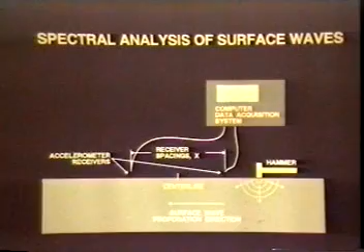I've got probably way more slides than I'll ever get through in half an hour, so we won't worry about that. I put the ones up front I think are most important to you. So with that, we'll just get into some case histories and applications here. Spectral analysis of surface waves. The only technique from one-sided access that you can sort of, in a physical testing sense, reach in and feel how hard the concrete is. That's the advantage of this technique. It shows you the variation of stiffness with depth.

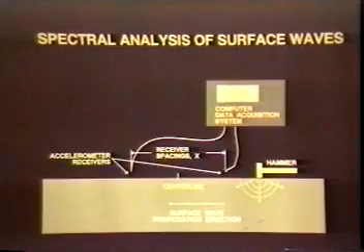So how does it do it? You have two receivers tapping the concrete, but you're looking at how a surface wave travels between the two receivers. The fundamental of physics is that velocity is equal to frequency times wavelength. I'm not going to dwell on that because with the modern PC technology and digital signal processing, it's basically done for you.

If you hit it with a high frequency impact and a short receiver spacing, you get high frequency waves. Say you had a layered system where you had different materials, ages, damage, whatever. Short high frequency wavelengths really only sample the first layer. Longer wavelengths see a combination of velocity that's a function of the stiffness of each of the layers.

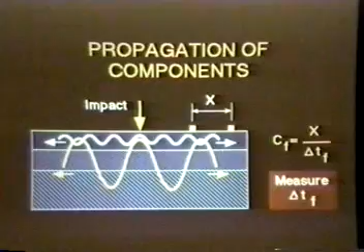This is a case history that was done a few years ago. It won a 1994 ICRI project award. Akers International was the main engineer. We were involved in looking at the condition of this dam. It was a 1906 construction vintage Tainter Gate style dam up in Michigan, subject to freeze-thaw damage. How many people know what that is? It's a log chute on a river. They used to bring the logs right through the center.

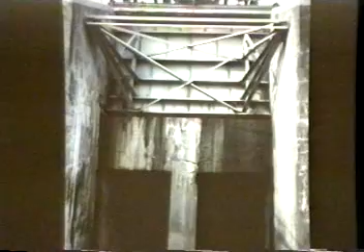Well, there's some problems with the dam. When you start looking at it, they couldn't tear it down and replace it because they'd never get it re-permitted. They'd lose all the power generation. Just wouldn't happen in today's environment. The upstream side below water, except where the ice damage occurs, was in great shape. The downstream side, which was subject to freeze-thaw and cyclic wetting and drying, had a lot of damage.

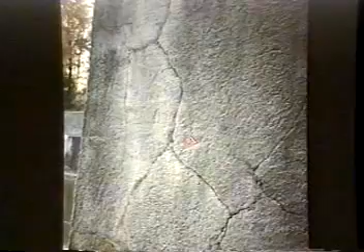They'd done a shotcrete repair and hadn't done it well because they had not removed enough of the freeze-thaw damaged concrete before they put the shotcrete on it. So just a few years after that, you had this kind of shotcrete repair. This presented problems from an impact echo testing perspective; it was hard to find spots where there was good bonding and we could test through it. Surface waves did a better job of looking through to see how deep was the damage of the freeze-thaw damaged concrete to be removed and rebuild it on the sound concrete of the piers that remain.

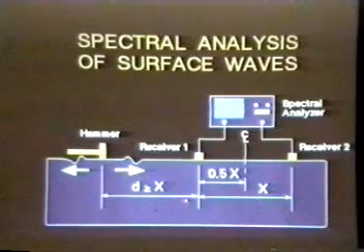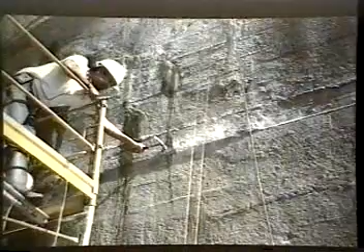So the idea again is hit it, look at the receivers, separated about X and X. So you start off with half a foot, 2 foot, 4 foot, doubling and so on to see deeper and deeper. So we did start off at about a foot with two receivers. Tap, tap, tap, took the data. Use bigger hammers to see deeper. Some of these walls and abutments were as thick as 7 feet. So we were going quite deep with the surface wave testing.

With impact echo, you have trouble seeing much deeper than 3 to 5 feet with good confidence in the data. Not so with surface waves. Your resolution of small defects diminishes, but you can see through. Literally, we've used it on dam sites for earthquake studies to several hundred feet. So you're not as limited that way.

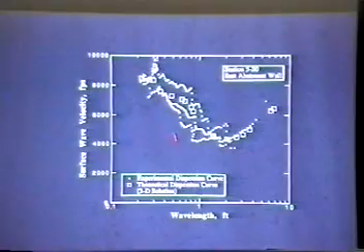The little white dots show that to about 3/10 of a foot, it was a fast shotcrete, about 8,500 feet per second. Then it got much slower to about almost 2 foot in wavelength before the data showed it getting faster. So this is like a stiff layer over a soft layer over a stiff layer. The open squares are a theoretical modeling that's done to get the thicknesses and stiffnesses of each layer.

The end result is inversion, where that's the theoretical modeling. You put in Young's modulus, or velocity of the compression wave or surface wave, Poisson's ratio, mass density. These two terms aren't too critical because you normally know them within reason. So we're really looking at velocity, which is related to modulus. Velocity squared is Young's modulus, stiffness.

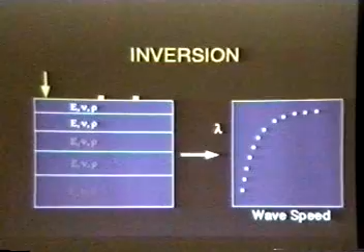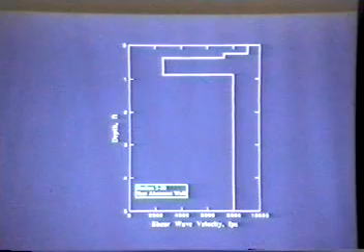So the end result was to show depth of penetration from the wall into the concrete, 0, 1, 2, 3, 4, and 5 feet. This is the fast shotcrete for about 3/10 of a foot at 8,500 feet per second. It dropped into a very damaged, down to 2,500 feet per second concrete layer. This was the freeze-thaw damaged layer. It went almost a foot deep, and then it was good concrete beyond that.

So the investigation was quite useful in indicating how much needed to be removed. When they did the removal process, it showed the damage zone. If it had been something they could have repaired, we could have done subsequent quality assurance of that repair by checking to see how much this zone was injected, say, and did it come back up into the normal velocity range.

So it's a useful test, one-sided access, literally, and I try and get people to understand this intuitively. It's like being able to reach through and feel how stiff is each layer in the system if you have a layered system.

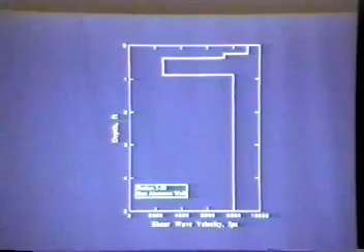We were testing a concrete wall with void and honeycomb last week. Impact echo and surface waves were done almost at the same rate of testing. First time we've been able to do that. Makes it much faster. We see this surface waves combining with some impact echo for thickness acceptance of pavements and other things where you don't know the thickness, minimizing the amount of cores, but still correlating with cores. I very much believe in cores. They're a good idea, we just take too many of them.

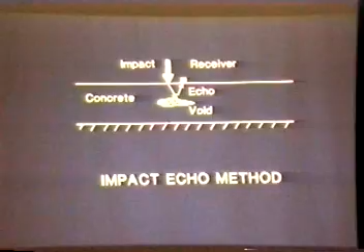Okay, impact echo. This is the one a lot of hands came up on. Hitting it, looking for an echo from a void or thickness of sound concrete, one-sided access. The basic principle, apply a force, look for the echoes in time. You can't see them. If it was metal, it's called pulse echo. You can see those echoes in time because the metal grains are so small, you can use high-frequency waves and get an echo. Concrete grains are large.

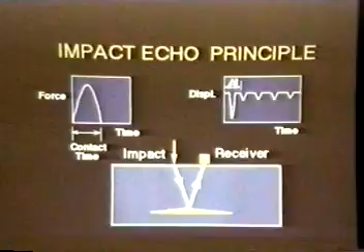You can't use high-frequency waves. You can't see the echo in the time domain. So you do frequency domain processing. You take the signal. Phase is what is used in surface waves.

I was kind to you as an audience and didn't subject you to phase discussion this morning. I know nobody will thank me for that, but I've tried it before on people and they always go, what?

Phase, though, is where we actually get the variation of velocity versus wavelength. There's a lot of technical papers on that if you want to learn about it. But the frequency spectrum is what you may have seen. This is the idea of what's the resonant thickness echo frequency. This is showing two peaks. This would be a flaw and a thickness echo.

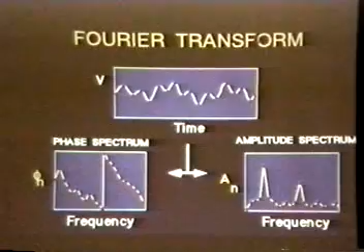Okay, here's a project we did recently with combined surface wave and impact echo testing. And it's so recent, I unfortunately don't have a slide of the results. But it was interesting because it showed a very good correlation on this old dam of an interesting phenomenon they found. They found out there were zones when they cored it of high-strength concrete and zones of low-strength concrete. I mean like 1,000 psi concrete versus 7,000 psi concrete.

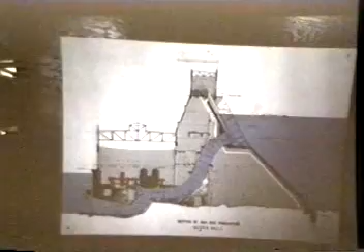You've got some problems. This shows a cross-section. You can get an idea that it's fairly good size, and you've got a lot of internal beams and walls that are bracing this whole system. Just the access through the galleyways.

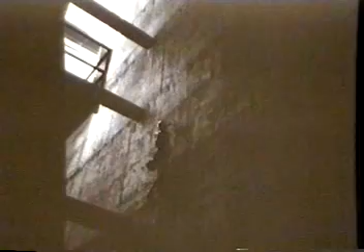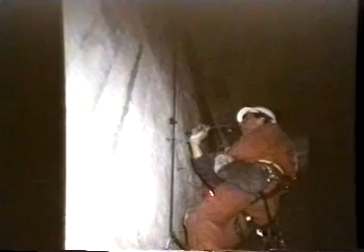The testing was interesting. A group that's called Difficult Access, I think, is the name of the company. They're out in Portland. They did the actual testing. We were there recording the data. We trained them down low, and they went and hung off of this inside of this dam all over. I'm glad they were hanging there, not me. But basically, they're hanging there and tapping and doing the impact echo and surface wave testing.

Kind of a rappelling exercise with tie-offs. Thought this was kind of interesting. The human fly. The testing was very successful in that it was correlated with cores to predict strength. We had velocities from surface waves, which was the more reliable test because sometimes the variations of thickness in the walls didn't let the impact echo test give us a good velocity. You can't measure the thickness every place.

Problem with impact echo is if the velocity varies, you can't predict the depth of the echo. Surface wave overcomes that by measuring the velocity directly. So we could tell them quality concrete regardless of the thickness of what we were testing. Excellent correlation with strength breaks on cores. It was able to evaluate where there was good and damaged concrete, aiding in their safety analysis of this dam for earthquake loading.

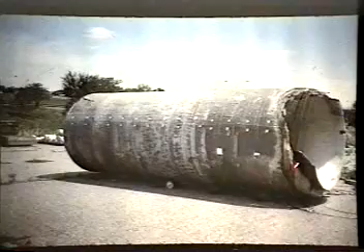We got the idea going, and the Bureau of Reclamation said we have a potential application. They have buried precast concrete pipe. Has anyone here ever been involved in repairing pre-stressed concrete cylinder pipe, out of curiosity? One person. This is what their motivation was. There's problems with pre-stressed concrete cylinder pipe sometimes. This is what we like to think of as known damage. So we were calibrating in our research. There's an area down there.

Basically, you have a thin steel shell, concrete on the inside and outside of that that's cast at the manufacturer. And then it's wrapped with a wire strand, and a mortar coat of about 3/4 inch to an inch thick is sprayed on it, is typical. Well, what can happen is you can get corrosion of the wires, popping the mortar coat. Of course, all of this pipe is generally buried. So you want to be able to test from the inside out and detect that delamination of the mortar coat, that loss of section thickness. And that's what we were doing with impact echo. That's just a close-up of some of the damage.

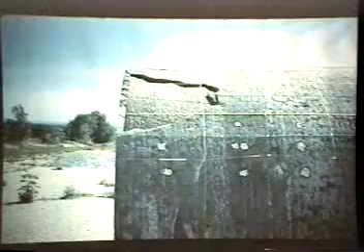If they'd have given us the contract, we'd still be working to test miles of pipeline. But just tap, tap, tap through a big pipe takes a long time. It's okay to spot check and do that type of testing. But if you're going to look at a whole pipeline, you'd like to eventually be able to scan it. And that's where we were working on the prototype technology to do that. They buried the test pipe later in the research, several sections.

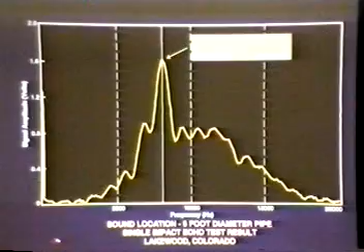This shows a sound result, 7.8 inch wall thickness at 8,080 hertz, 0 to 20,000 hertz. This shows a delaminated result that's predicting 6.9 inch wall thickness. The mortar coat has come off and is a thinner section by about 1 inch.

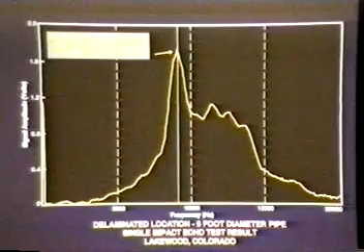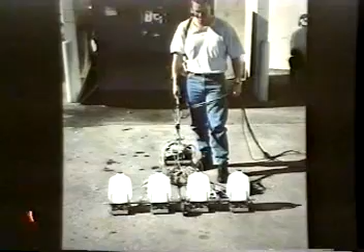We then made a prototype slab scanner, just unfolded it for pushing along on floor slabs. We applied it on a building on an actual consulting project in Hawaii that we've written about. And we were able to do 23,000 tests of 6,700 square feet in 16 hours of testing time. So we were really moving.

But this is an unusual owner that wants to know every third of a square foot, how good is his concrete slab? It was a 4.5 inch thick slab. We've got references and papers on this if you're interested. The reason they wanted to know is the concrete was hitting the acoustic ceiling tiles of the room below. It was quite serious. And they wanted to literally map the cancer, map the problems with those slabs.

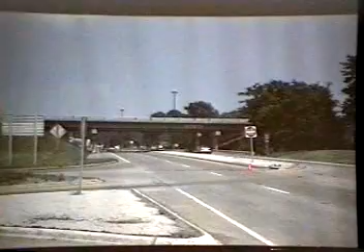That just shows using it. We actually tested through a thin asphaltic coating. That worked out well because it was still smooth. When it gets rough, this technology is not yet ready for rough concrete. We tried it and demonstrated it on a bridge deck last summer with the University of Illinois research project for the Illinois DOT. They had a very rough asphalt.

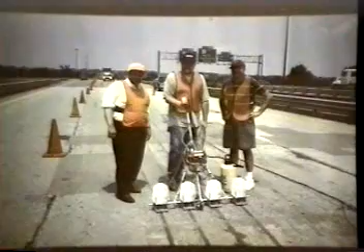We had about a 15% success rate where we could get good echoes and evaluate the soundness of this asphalt overlay deck. That wasn't unexpected. It was a research project. We told them up front, look, if you're willing to help us evaluate it, great. We'll see our problems, but we know where the asphalt's rough, it's not going to work. And that was the case.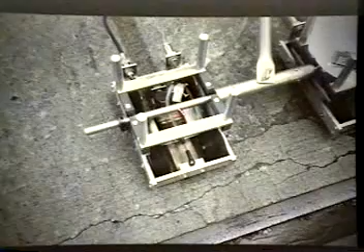But still, the bridge engineers were quite interested to see this technology, hoping long-term to get a more accurate indication than they get out of ground-penetrating radar and infrared thermography. Just PC-based data acquisition again. Pushing it along water-coupled. Here you can see a close-up of a unit and the water trail behind it. And you can see it was pretty rough surfaces. In some ways, I was surprised it worked as well as it did, to be honest.

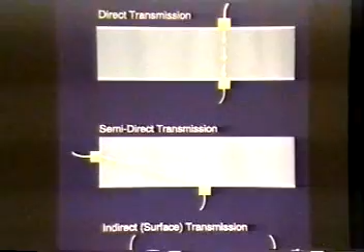The ultrasonic pulse velocity method, you can't quite see that, but this is pulse velocity, sending a sound wave through concrete. Semi-direct around the corner, that's direct. Indirect, you don't see very deep. This is really only sensitive the first inch or two. People have used pulse velocity for fire damage evaluation. Surface waves would be and is superior to pulse velocity for fire damage evaluation because it shows you the variation versus depth, whereas pulse velocity is a refraction phenomena and not as accurate.

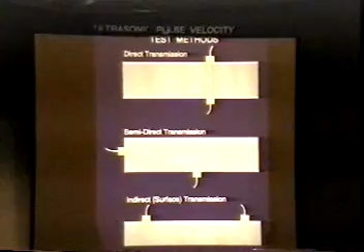The basic test, sending and receiving, grease coupled, checking this bridge column for some void. It had been buried for years. They dug it up and they had surface void exposed. So they got concerned about interior void. The unseen defect. PC-based recording, a live signal.

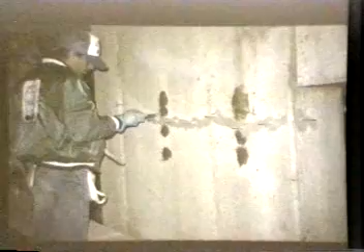This is on a parking structure precast at Dallas-Fort Worth Airport, looking at quality assurance of epoxy injection. Testing through this beam and across diagonally this crack, and then comparing diagonally through sound concrete. It was really only a hairline crack, very tight.

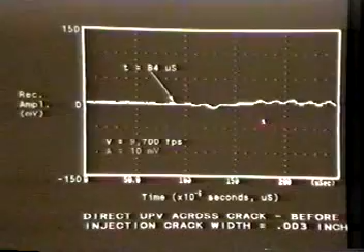Before injection, almost no signal. The meter was misleading. If you just used the straight meter, it said 84 microseconds. In reality, the signal's out here. It's very slow, just an open crack by testing diagonally across it.

This shows after injection, much better signal 1 day later, 14,000 feet per second. That compares to 14,500 in an uncracked section. Quality assurance of the fill in this case. You can do quality assurance of epoxy injection repairs and other repairs with any of the three methods I've talked about so far. There's advantages, plus and minuses to each of them.

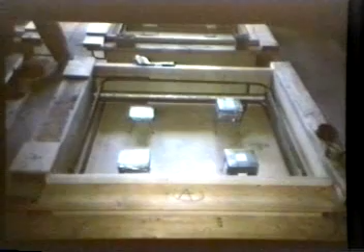We've done a little work on scanning, mostly in research. The idea of a fixed receiver and moving a source. This is a research project we did for National Science Foundation, some small business research, to try and image built-in flaws in concrete. These are voids. We found these the best. Styrofoam blocks.

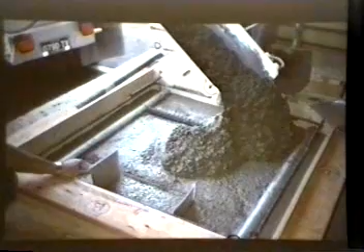We didn't do so well at these, partly because while occasionally a contractor is able to build a perfect defect, we didn't. These little Ziploc bags were supposed to simulate an open crack completely filled with air. We should have vulcanized them or used really heavy rubber because they became tightly closed cracks as soon as the concrete hit them.

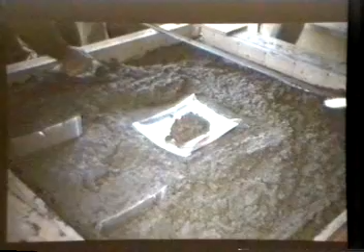It really takes a little talent to build the perfect defect. You probably didn't think that. This one really collapsed. We cast some honeycomb concrete blocks, and then we did the testing.

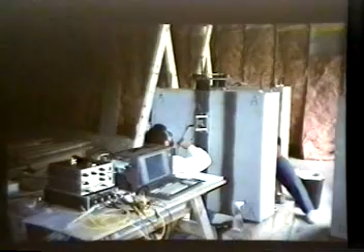Prior to this research, a School of Mines professor had done some work simulating tunnels for tunnel detection over in Korea for the military, and he actually took 2 weeks of a graduate student's time to get the data from one set, one line.

And I thought I had a bad professor in college, I tell you. No, I really didn't. I had an excellent professor, but he liked to work hard too.

But we couldn't afford that. So we managed to come up with a scanning source that moved and clicked, water coupled, and we could get the same amount of data with a single receiver on the back in an hour and a half. I think if this technology becomes popular, we'll use multiple receivers, and it'll get the actual data acquisition time down under half an hour, maybe even 15 minutes.

But again, most people don't necessarily need to see internal conditions in concrete with a tomogram. They might be happy with the impact echo, surface waves, or pulse velocity. But I wanted you to know the technology now exists.

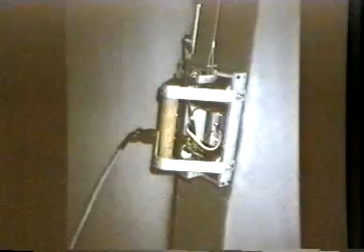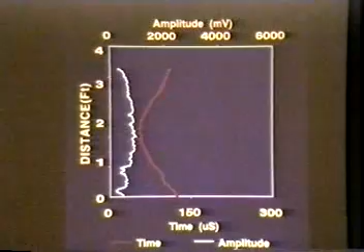Because tomography basically means that we had that receiver at 38 different locations on the backside as we moved the source, clicking 38 times up this way. So you have almost 1,500 pieces of data that are analyzed to produce this image. So it's quite a bit of data.

We think if we can do amplitude tomography, the energy of the signal, we did a little research on that, as well as velocity, that this technology could someday, with some investment and research funding, start to look almost as good as they do in medicine. But it's a more difficult material to test than the human body. And so far, I haven't seen anyone as worried about cutting and coring into concrete as they are the human body.

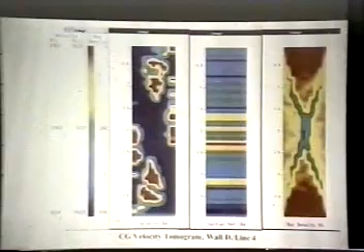Okay, the conclusions. It was practical because scanning makes it a lot faster. It worked best on the voids, good to fair characterization of honeycomb, cracks and weak concrete.

Okay, how many people here have ever had to do underwater repairs? 1, 2, 3, 4. On foundation elements and walls, that type of thing? Okay. I decided to show this one. We do a lot of quality assurance of new concrete placement in drilled shaft foundations for bridges because it's underwater concrete placement. They cast in place access tubes, and we do basically ultrasonic pulse velocity testing between these water-filled tubes. That's what's called cross-hole sonic logging.

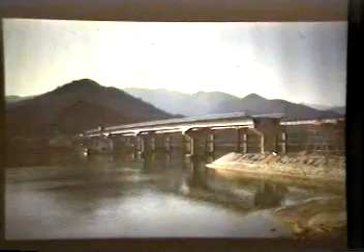The parallel seismic we normally do for unknown foundation depths. How deep is the foundation, using a boring? But this application was on an existing foundation. They knew how deep it was, but there was a concern over cracking. It's in the south of Korea. You've got 4 piles, cast-in-place concrete pilings, under each one of these, to 5 piles.

I'll never forget sitting in a little cafe, and an 80-year-old Korean man asked me through the translator, "Why is this 1909 Japanese bridge working great and our 7-year-old new Korean bridge falling down?" That's the way he put it. The answer is, it probably was well built, but they had taken heavily loaded steel trucks and literally failed the superstructure of the bridge in 7 years. They didn't pay any attention to load limits. They just tore it apart.

But when they were taking off the superstructure, it's kind of missing back here, a TV crew came out, the world all over has TV crews, and they discovered there were all kinds of cracks in the exposed piles when the tide went out. So now there was a concern. Were these pilings cracked all the way down?

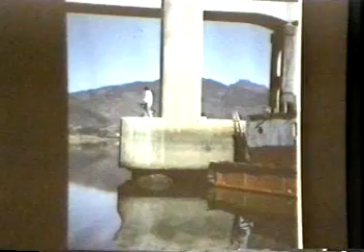So we got out there doing our testing, and the tide basically oscillated here to here. They had drilled through and put slope inclinometer casing 10 to 20 meters down through the water in the soils, and down to a total depth, I think, on the order of 70 or 80 feet, if I recall correctly. And we were going to test with parallel seismic and cross-hole sonic logging between these tubes. They had tubes on opposite sides, sometimes 2 tubes, sometimes 4 tubes, and we were testing and sending the wave through the water, through the concrete.

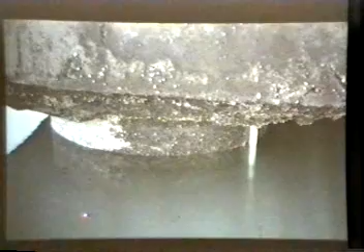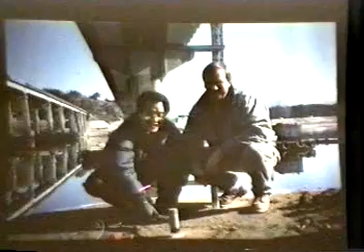Where normally we would have tubes inside of a concrete foundation for quality assurance testing, you can put them outside. It works very well in the water zone because you get perfect coupling through water. If the sediments are fully saturated, it works well too. If they have any gas in them, then you lose the signal, as you'll see. But this was doing the parallel seismic testing, hitting the top with an instrumented hammer to send the wave down.

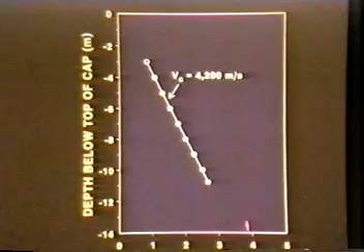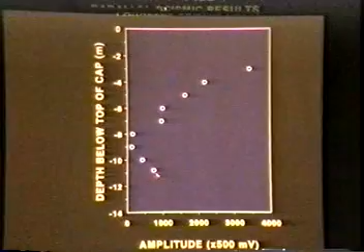What did we see? This is depth, 0 to 14 meters, time, 0 to 5. Very good data, just showing the velocity of concrete, 4,200 meters per second. Zip, zip, zip. Had there been a break or poor quality, we'd have seen a step to the right and a loss of signal. This shows the amplitude of the signal. In the water zone, it was very high. Then it dropped in this zone of the soils, and then it got higher again in the soils. But always good signal arrival.

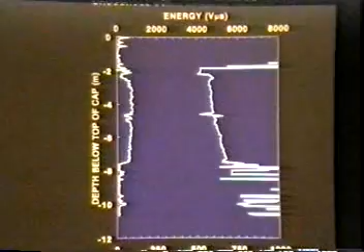The sonic logging, we dropped 2 probes, 1 in each hole, and pulled them over this depth wheel, checking automatically about every 2/10 of a foot. You can do a sonic log in 5 minutes on 100 feet, no problem. And you've just taken 500 measurements of the speed of sound between the 2 tubes, which are through the pile cap here. This showed excellent signal in the water zone. The tubes wandered, so it took longer, uniform energy versus depth.

And then we had some signal in the soils, but we also had a lot of zones where we lost it. This was correlating with the loss of amplitude in parallel seismic. Gaseous sediments, silts, were actually not fully saturated, attenuating the signal. The combination of the 2 tests led to the conclusion that the foundations were sound.

The problem was this. They did a very unusual construction technique, almost like a caisson. They sunk a heavy casing all the way down, inch-thick casing, greased the inside of it, excavated the soils out, of course, filled it with concrete, and at 12 to 24 hours of age, they pulled that casing off the concrete to reuse the casing. And it didn't always come off easy, so they racked it at the top and cracked it. That was what happened. Steel was expensive. They didn't want to lose it.

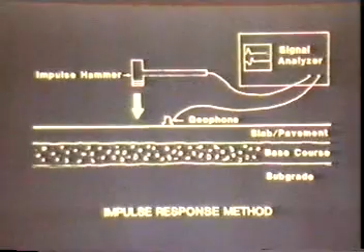Impulse response. I think I have enough time to get through this. This is the idea. How many people here are involved in slab jacking, mud jacking? Anybody? One person, a couple people. This is looking for voids. You can do it outside of a concrete slab on grade or pavement. You can do it for a conduit of a dam, looking outside of tunnel linings, that type of thing. Looking for voids, loss of subgrade support. Hitting with an instrumented hammer, measuring with a geophone.

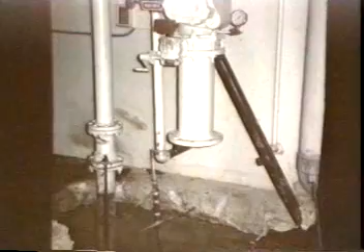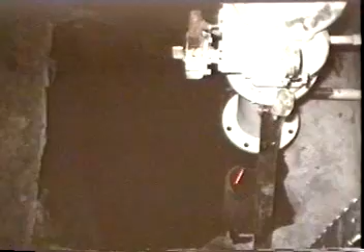This was in Dallas. It had 3-foot deep grade beams going down to keep the nasty moisture away from the expansive soils. They were all throughout this site. Well, it acted like a piston. It just confined the water, up came the slab. Looking down into the pit, and it ran for 4 hours before they could turn it off. They had 2 feet of water. This shows heavily loaded slab. These are bearings, very heavily loaded slab.

That slab, this is a 6-inch ruler, a 6-inch diameter steel pipe column, painted. It lost 17 inches of paint because the slab floated 17 inches. It cracked at the edges. It was welded wire fabric reinforced, cracked about 6 foot in, but held together, crowned very nicely. The building general manager said when he walked in, he thought the roof had come down. No, the floor had come up.

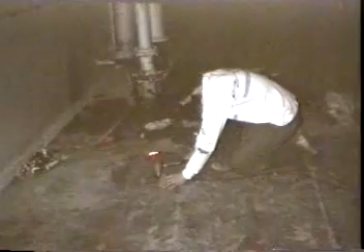So it's just amazing. But once the water was shut off, all that slab load pushed the water out. Now the question became, what support did they have? And that's where we came into it. We sounded it off on about an 8-foot grid. We typically test on 5 to 10-foot grids, sort of like slab jacking, to define the area of support.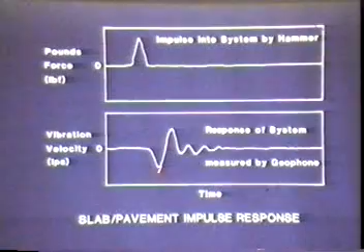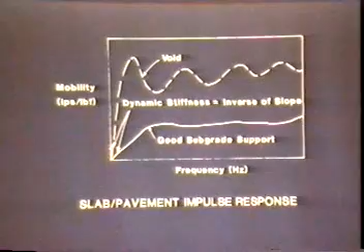We can't tell how thick the void is with this test, but we're very sensitive to the degree of support because we're measuring stiffness. So you measure the force applied with that instrumented hammer, you measure the vibration response, then you process it. A void will have a higher vibration per pound force and more irregular shape versus good support. Less vibration per pound force and stiffer at the low frequencies. So it's just a way to quantify what you all know.

This shows before grouting, it was actually quality assurance as well, and after grouting, changing the stiffness from 170 kips per inch to 500 kips per inch and smoother. We had excellent correlation. Works very well on 6 to 12 inch slabs, 4 to 12 inch slabs. You can do it up to 2 feet, but you have to be very careful as the slab gets thicker because it gets to dominate the response just because of the thickness of the concrete.

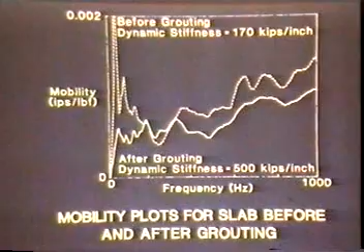Considering that the velocity through the concrete is a function of the porosity of the concrete, have you tried quantifying the moisture content or variations in the moisture content in a concrete slab? The reason I ask is we are using GPR to do that, and we're getting very good results. So I was wondering if this sonic method could be used for that.

There's a slight relationship of velocity and whether a concrete is saturated or not. But I wouldn't recommend using it for what you described. I think the radar is a better technique. There's also some dielectric-based measurements. That's exactly what we're doing. Yeah. Percometer, yeah. Okay. And there was a question here?

Yes, sir. Surface wave testing, I believe you said you have to have a pretty smooth surface for that to work. No, that's actually on impact echo scanning. Surface wave testing, you can always grind a concrete if it's that rough, but that new bar is surprisingly good at working on rough concrete. For extremely rough, you can use accelerometers and little washers and grease mount them, and then they magnetically attach the transducers and normally deal with rough concrete. Now if it looks like exposed aggregate terrazzo finish, it gets harder.

That's what I was wondering, how rough is rough? We've never found a concrete surface we couldn't test with the stationary tests. The scanning's a different story because you start bouncing and you don't get the coupling, but a stationary point we've been able to test. Okay. I guess the answer to how rough is when you cannot get any even vertical base at all. There can be too rough. I remember some finishing where they just left the excess concrete all over it, and that had to be ground. Okay. Any other questions?